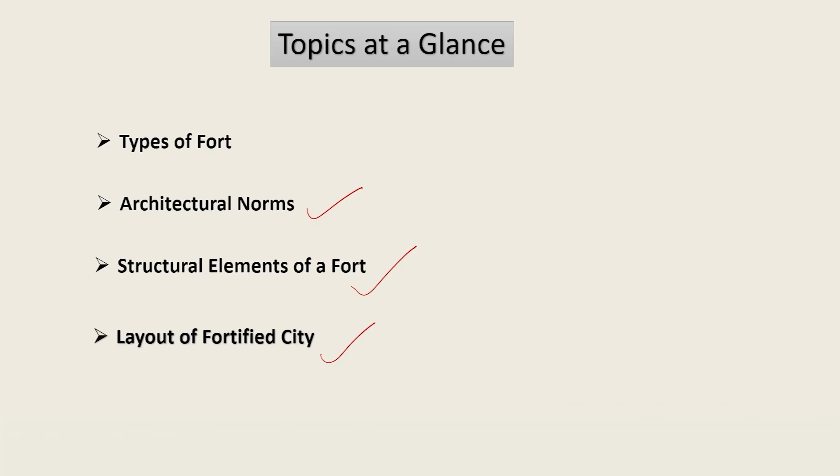In this topic, we are going to discuss types of fort, architectural norms, structural elements of a fort, and layout of fortified city. You must be thinking why these points are important in this scientific aspect of Arthashastra, because this type of information, these architectural norms, structural elements and layout give information regarding the scientific practices done by the people of that time.

The particular shape of architecture, the particular shape of a fort and the different dimensions of the fort as well as layout of the city is based on a scientific platform, is based on a particular module, and this module is very important to understand the scientific development and the scientific understanding of a particular time period. So, these kinds of structures are also part of the scientific study we are dealing with here.

The construction of fort and the layout of fortified cities in ancient times reflect a sophisticated blend of science, technology and strategic planning. These were not just defensive structures, but advanced urban systems built for military strength, governance and sustainable living. Geometric city planning used standardized measurements with roads categorized by function: royal, irrigation or pedestrian. Engineering principles shaped moats, ramparts, drawbridges and hidden passages for maximum defense and visibility.

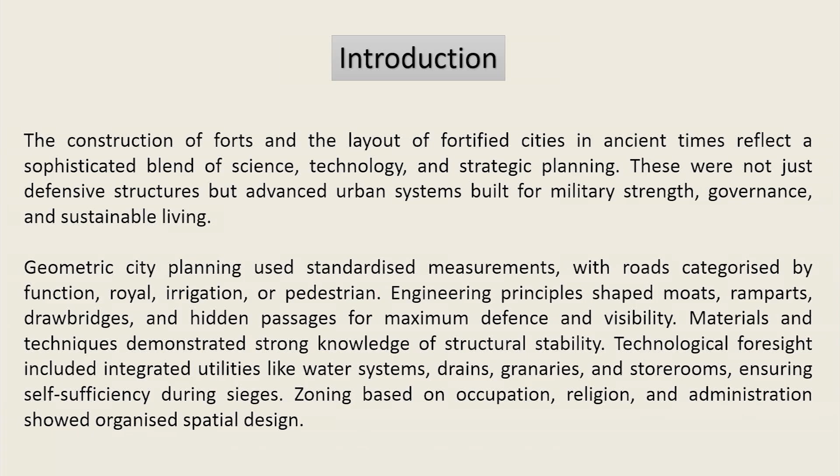Materials and techniques demonstrated strong knowledge of structural stability. Technological foresight included integrated utilities like water systems, drains, granaries and storerooms, ensuring self-sufficiency during sieges. Zoning based on occupation, religion and administration showed organized spatial design.

Now, the types of fort mentioned in Kautilya Arthashastra. Various types of forts were constructed based on geographical and strategic considerations. Here it is important: the building of a fort depends on that particular geographical strategy. If a fort is present anywhere, then we must believe that the makers of the fort were well aware of the geographical condition and the climatic condition of that particular zone.

The first fort is the water fort, Audak Durg, surrounded by natural water bodies such as rivers or by artificially created moats filled with water. These forts relied on aquatic barriers for defense. Now, the hill fort, Parvat Durg, built within mountainous terrain between hills, valleys or within caves. These forts leverage natural elevation and difficult access for protection.

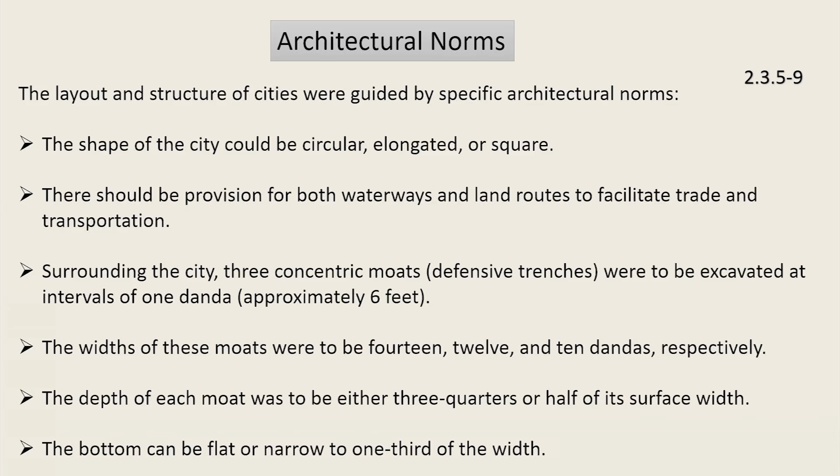Moats were very important from an ancient perspective. They were paved with stone or constructed with stone or brick lined sides, connected to natural springs or filled with external water sources. A rampart was to be constructed 4 dandas, approximately 24 feet or 7.2 meters, beyond the outermost moat using the earth excavated during moat construction.

The rampart was to be 6 dandas high, approximately 36 feet or 11 meters, and twice as wide at the base, topped with a flat platform-like surface or a jug shaped curve. It was compacted and reinforced by trampling with elephants and bullocks, and lined with clusters of thorny bushes and poisonous creepers along the side for additional security.

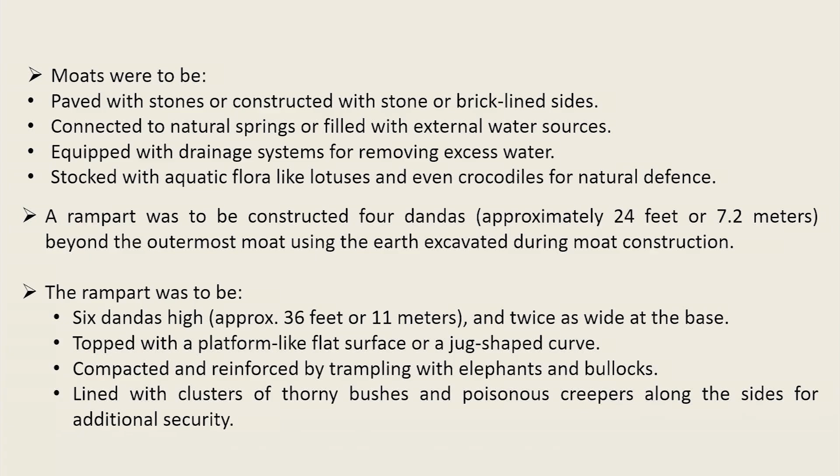On top of the rampart, a parapet wall was to be constructed twice as high as it is wide, built from bricks. This construction is also mentioned in Kautilya's Arthashastra and is part of scientific study. Its height ranged from 12 to 24 hastas, approximately 18 to 36 feet, either in odd or even numbers, designed with a passage for chariot movement. Alternatively, the parapet could be constructed from large closely fitted stone slabs, but never made of wood, as it can easily catch fire and is unsafe for defense.

So we can understand the knowledge of that particular time mentioned in the Kautilya Arthashastra. Not only the protection of the fort, the rampart wall, and the parapet construction, but even the material used for the parapet is explained in this text, since if the parapet is made of wood, it easily catches fire. So the parapet construction should be done very carefully.

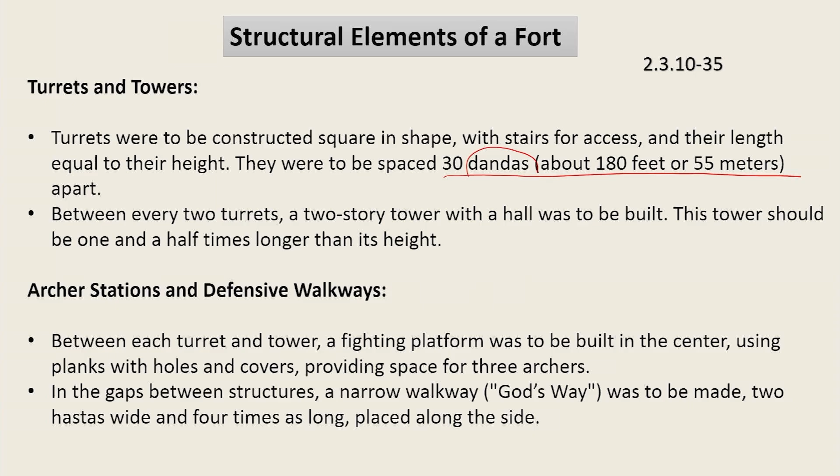Now, the explanation on archer stations and defensive walkways. Between each turret and tower, a fighting platform was to be built in the center using planks with holes and covers, providing space for 3 archers. In the gap between structures, a narrow walkway called God's way was to be made 2 hastas wide and 4 times as long, placed along the side.

Internal fort pathways: inside the fort, paths should be 1 or 2 dandas wide, including runway and exit doors placed in strategically secure locations. Regarding external fort defense, outside the fort a covered road was to be constructed, rigged with numerous defensive traps and deterrents such as knee breakers, spikes, hidden pits, concealed traps, barbed wires, and uniquely shaped obstacles. This shows that the construction of that particular path or area is a scientific construction, where security is important, and the idea of execution is part of scientific study.

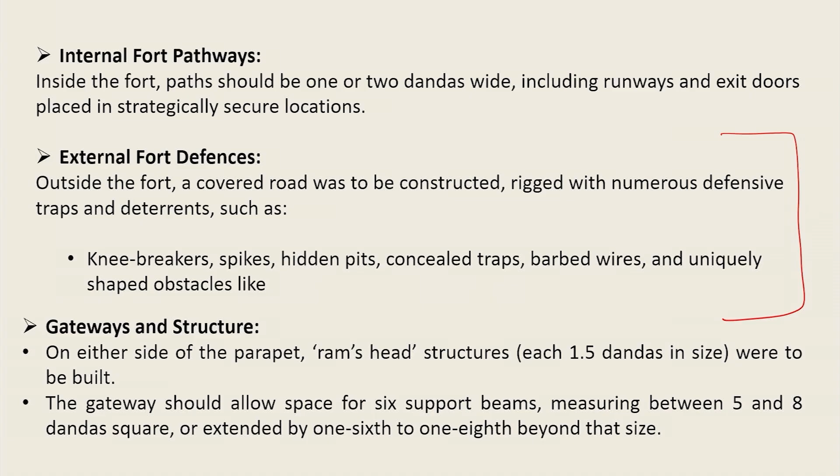Gateway and structure: on either side of the parapet, ram's head structures, each 1.5 dandas in size, were to be built. The gateway should allow space for 6 support beams measuring between 5 and 8 dandas square, extended by 1/6 to 1/8 beyond that size. The floor height was to range between 15 to 18 hastas, approximately 23 to 27 feet.

Pillars were to be 1/6 of the length in circumference, with twice the circumference below ground for stability. The capital, the top part of the pillar, should be 1/4 of the length in circumference.

Now, the explanation about the interior layout: 1/5 of the ground floor should be occupied by a hall, a well, and a border room. Two platforms facing each other were to occupy 1/10 of the area, with two doors and a central room in between. At half the height of the floor, another structure was to be built supported by pillars.

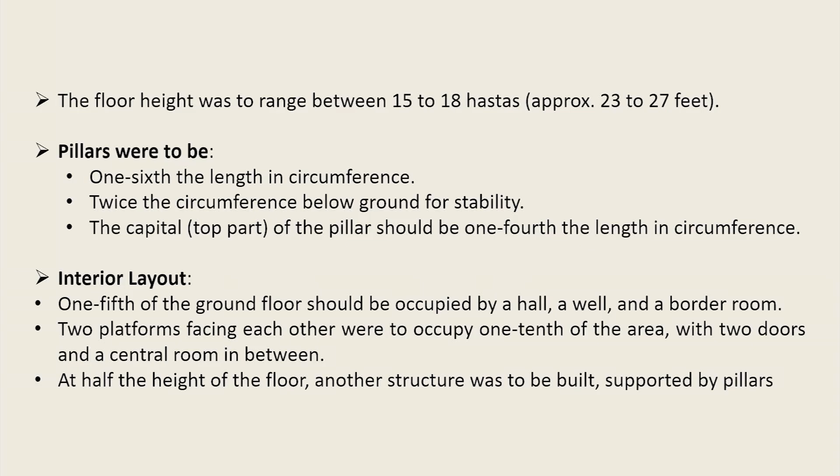Now, upper chamber construction. We have to be very careful about this lecture, because we have seen the scientific approaches present in the different constructions mentioned in Kautilya's Arthashastra. The fort, the moat, the rampart wall, the different layouts, roads, interior and outer construction, home construction, and well construction are all based on a scientific measurement, giving an example of a very good scientific approach and measurement scale described in Kautilya's Arthashastra.

Now, upper chamber construction. The fortified structure should include an upper chamber which should occupy either half or one-third of the total built-up space. The construction material shall be brick masonry for strength and durability.

The chamber must be accessed by two staircases. One visible staircase is positioned on the left side, ascending in a left to right direction. Another concealed staircase, hidden or usually less prominent, is embedded within the opposite wall, allowing discrete or defensive access.

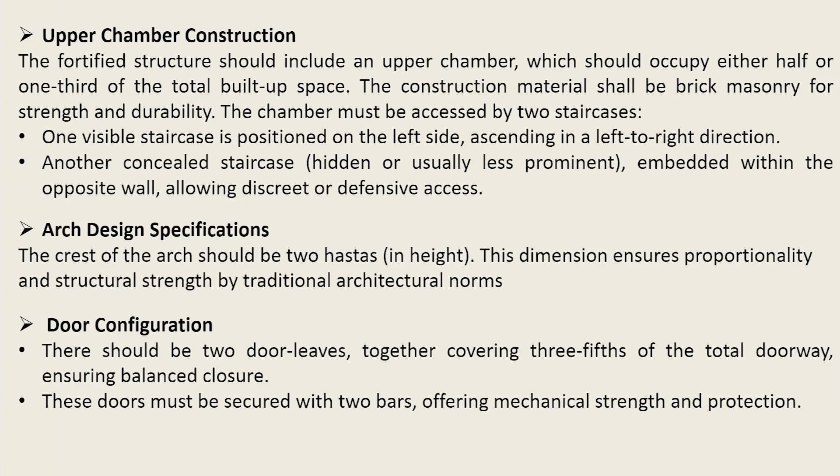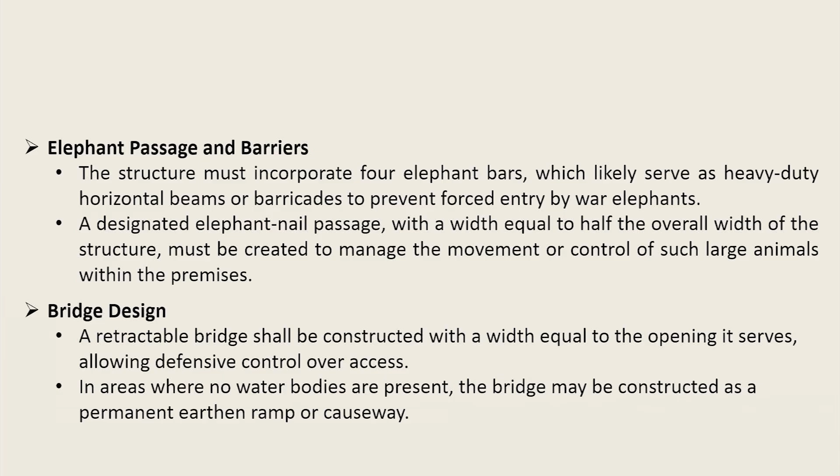Now, the bridge design. A retractable bridge shall be constructed with a width equal to the opening it serves, allowing defensive control over access. In areas where no water bodies are present, the bridge may be constructed as a permanent earthen ramp or causeway.